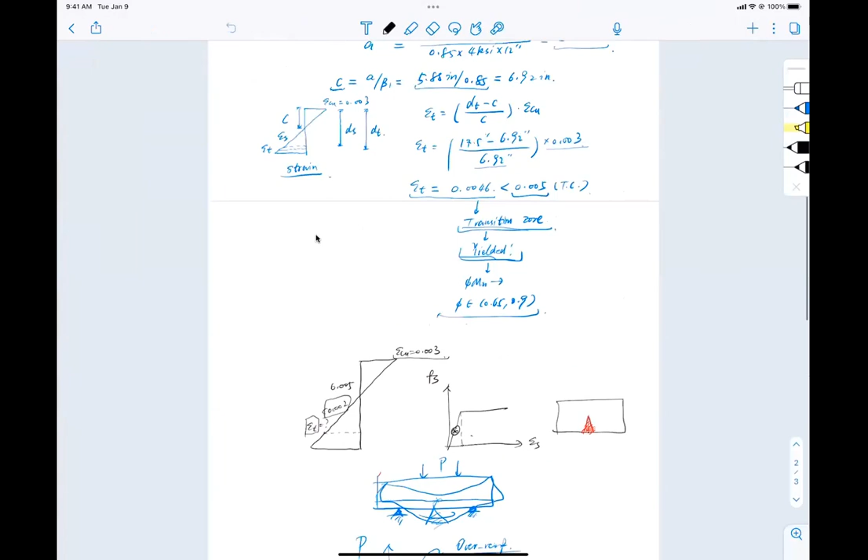Okay. All right. So let's talk about it. We had an example last time, right? What did we do last time? We have a section. Well, you know what? Sorry, but I can use last time's notes and finish this part and start with a new one. Okay. So last time we had a section like this. 4 number 9 bars at the bottom. We calculated the center of the 4 number 9 bars and found out the depth of it is 16.5 inch.

Okay. Now, quick thing here. I have 4 number 9 bars. They are spaced 2 inches apart. And let's just say I'm trying to find the distance between the center of these two rows, right? It's got to be 1 inch here, and this is 3.5 inch. And 20 minus 3.5 inch is 16.5 inch. That is faster than finding the centroid of the group of bars, isn't it? That is faster, right?

Can you always do that? Answer is no. Why? Because I got lucky. I got 4 of the same bar size. If the bars are different sizes, you cannot do that. So the safest bet is always go with the equation. Okay, don't just pick the center of the group of bars geometrically. All right, got it.

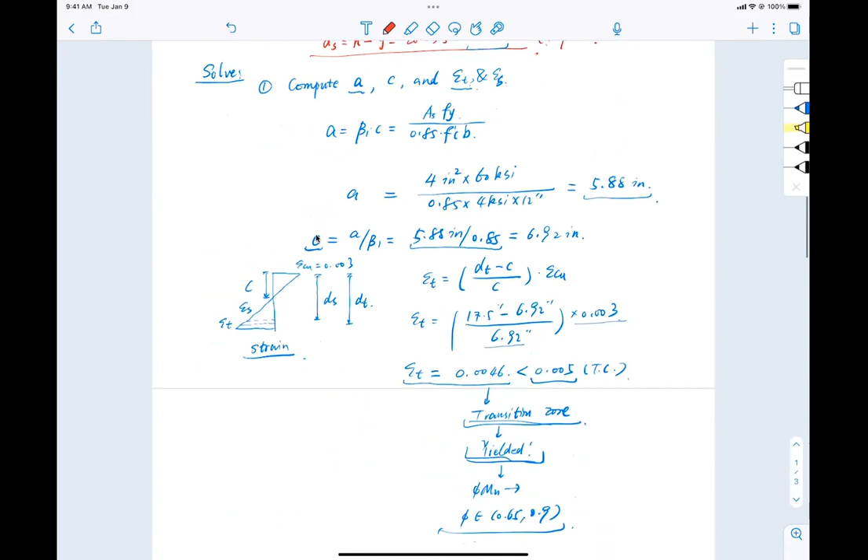Okay, quick thing. So now we got a depth equal to 16.5 inch, and we did the whole thing, right? Find out the compression side c, check the strain, and we left at a happy smiley face. That is, the strain in the steel is, well, not so happy, slightly lower than the tension control limit. What does that mean when you see this?

Well, first, it's bad, right? It's not 0.005. So I know that phi is not 0.9. It's probably smaller than 0.9, isn't it? Somewhere between 0.65 and 0.9. But is this one bigger than 0.00207 or not? Yes, right? What does it mean? It means what? Steel yielded. What's so good about yielding?

When yielded, I can always say that the stress in the steel is equal to what? Grade 60, equal to what? 60 KSI. There you go. So that's where I'm getting at. Trying to make sure I know the stress in the steel. And when the steel yielded, I know that it is 60 KSI. Why do I need to know that? Because As fy gave me the total tension force I start with. This is where I start with 4 inches of 60 KSI.

Remember? You say, Bob, you know that. Why are you doing this again? I'm confirming that. Don't forget, this was an assumption at that stage, right? At first, nothing happened, right? It's not like the Bible when God says something. We just make things up. We don't know.

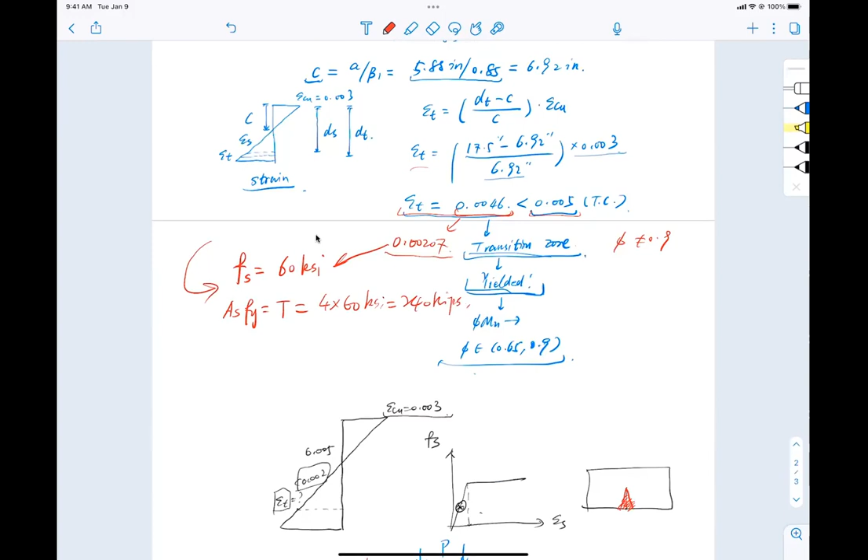And now we confirm that this is 4 times 60 KSI. That is 240 kips. All right. So that is why we're doing this. We're confirming it. Now we know tension is this one, and this business is about under reinforced, over reinforced.

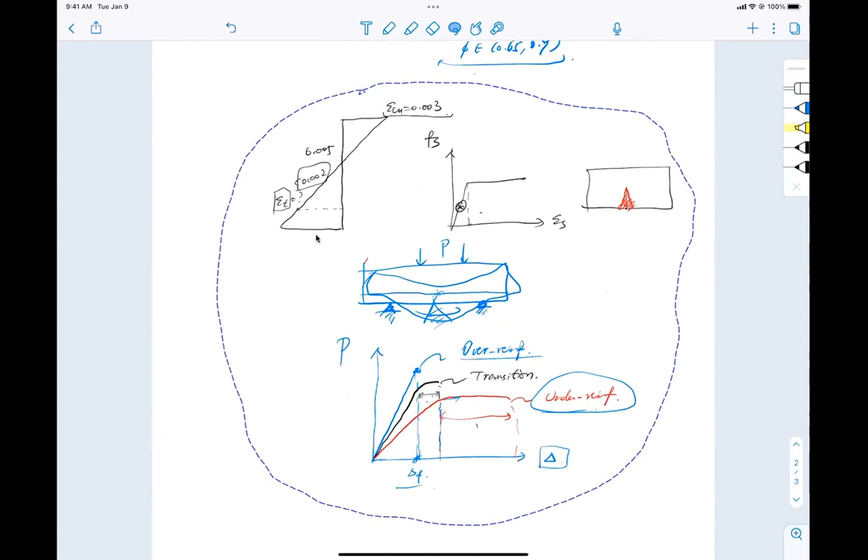But now let's continue this. I know the tension force is 240 kips. I want to find out my nominal moment capacity, which is Mn equal to T times lever arm. What is the lever arm here? We just said tension force multiplied by distance. What is distance here? Give you a hint. ds minus what? a over 2. Great. You got it, right?

So now Mn equals 240 kips, and get your calculator ready, right? I didn't do this myself over the week. I'm lazy. Remember, Bob is a lazy guy. I need your help to calculate the number for me. 240 kips times ds minus a, what is a? 5.88 inch divided by 2. So can somebody give me a number of this? Pull out your calculator. Let's do it. Come on, a lot of fun, right?

ds is 16.5 inch. That is the depth of it. 240 kips multiplied by 16.5 minus 5.88 divided by 2. Come on, I need a number. Anyone? Should I start giving points? 3,000. Louder, please. 3,254 kip-inch, right? Great. So are we happy with this?

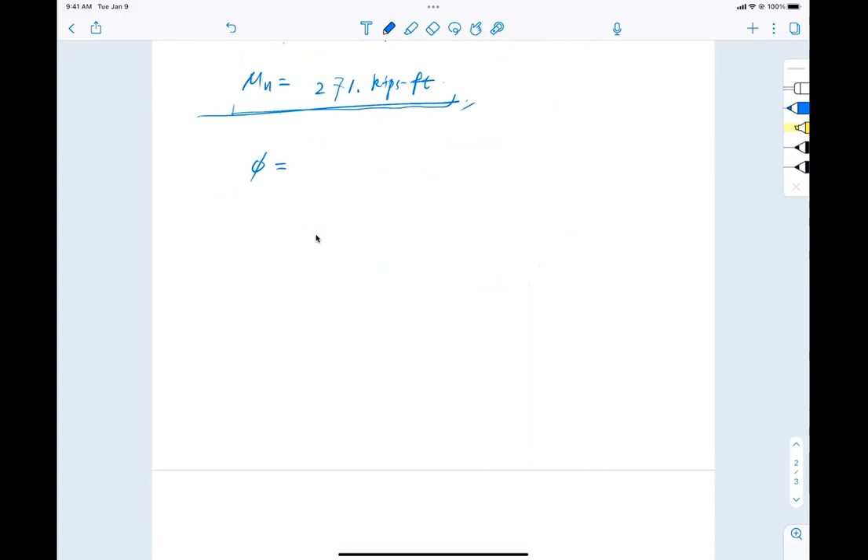Now phi, strength reduction factor. You remember the equation for strength reduction factor? Do you? Because I sure don't. I forgot about it. I'm lazy. So what do I do? I draw my drawings. So what does phi look like? This is phi. Horizontal axis.

What do I use? Epsilon S or epsilon T? T. There you go. Epsilon T, not epsilon S. You say why? Last time it happened in one row. This one is not one row anymore. So in this case, when I have epsilon T smaller than 0.002, what is my phi?

0.65. If it's bigger than 0.005, what is my phi? 0.9. There you go. So I draw a line like this and draw a line like that, and then in between, linear interpolation. And actually, this slope here is 250 divided by 3.

Okay. Now you have this information. Do you now remember the equation? Duh, I remember it. Why? Because now phi equals 0.65. It's the beginning of the step, right? I start climbing the ladder, which is epsilon T minus 0.002 multiplied by the slope, which is 250 divided by 3. And that, ladies and gentlemen, is my equation for phi. See how I remember it?

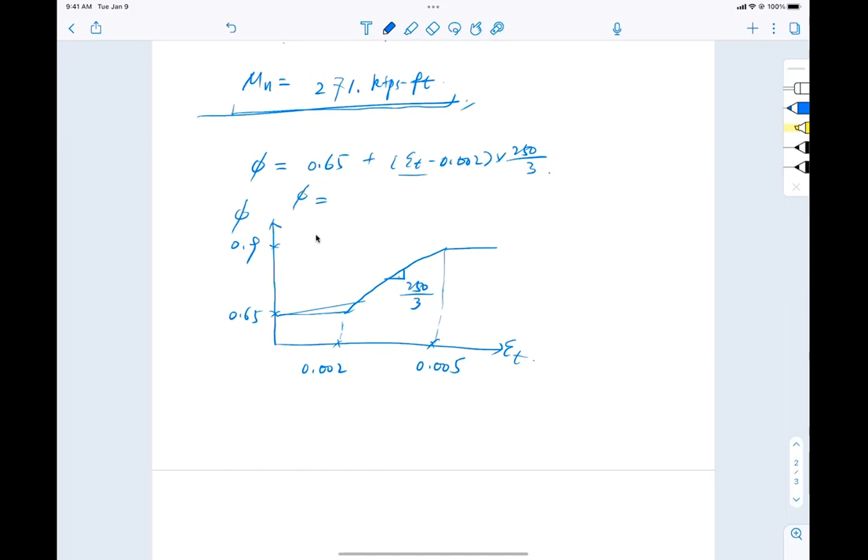You can do the same to simplify, okay? A dry equation will never stick in your head. You gotta have some graphic, some image to go with it, okay? Make life easier. All right, so now what is my strain in epsilon T? Let's copy it down. Phi equals 0.65 plus, what is epsilon T here? 0.0046 minus 0.002, multiplied by 250 divided by 3.

What do I get? Folks, come on, your turn now. Don't disappoint me, please. Let me hear some number. Use your calculator. 0.65 plus this fellow minus 0.002, multiplied by 250 over 3. What do you get? 0.87 exactly. Do I get a second? All right, good deal.

So now what is my design moment? Phi Mn equals 0.87 multiplied by 271 kip-foot. And what do you have, guys? What do you have? Don't stare at it. If you forgot your calculator, bring it next time, okay? You will need it for this course. What do you get? Any number? 235. Do I get a second? Yeah. All righty. We're moving on. Wonderful.

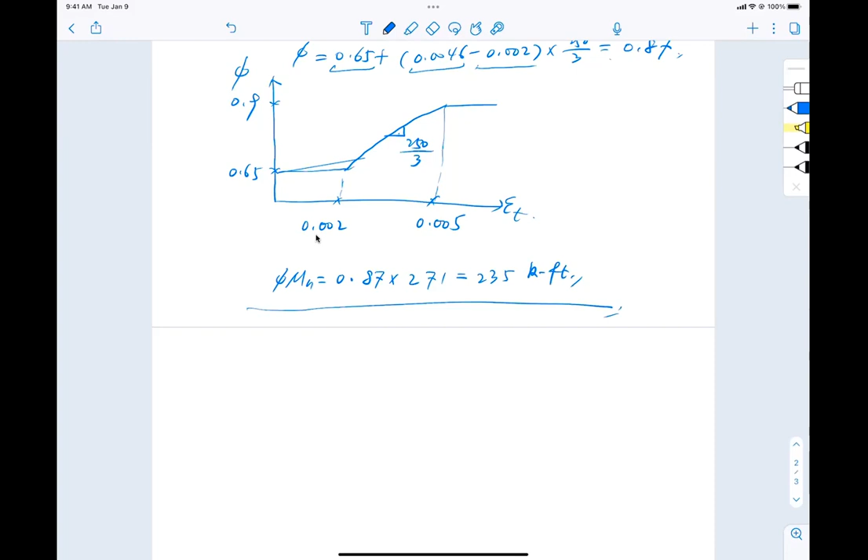That's it. Is it hard? If this happened in the exam, can you not ace it? Of course we will, right? It's simple. What if we make it more interesting? Just like in the casino, right? You pass the first slot machine, now we're doing Russian roulette. Let's play a little more. Red and black, what's the number? Same section, nothing has changed, but I'm going to change my reinforcement.

How am I going to change my reinforcement? Give me 1 second. Let me see if I have the old lecture note 3. Okay, I don't. I'm really going on the fly today because I didn't put the notes on it. So you guys really have to help me out here. I don't know the number. I have no idea. Bear with me 1 second. Let me at least have some backup plan in case I mess up again. 291.4. I think I got this one. Okay.

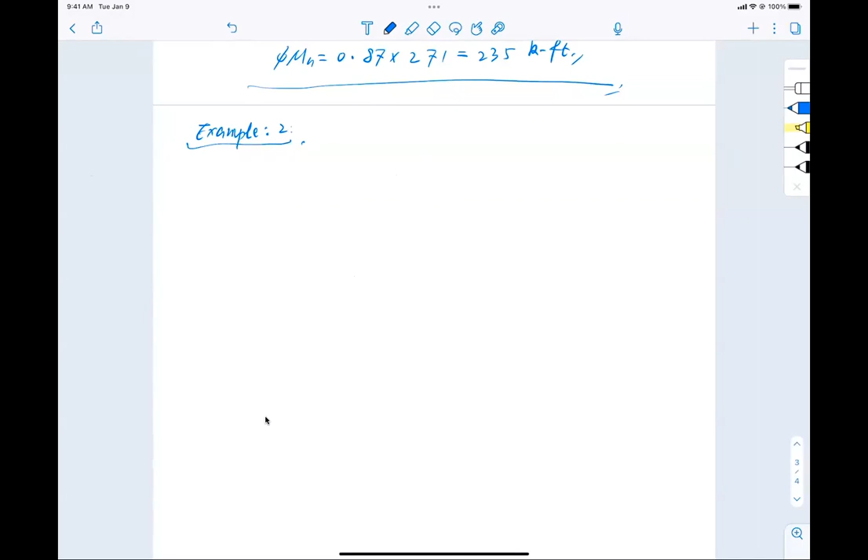Okay, so this is my old notes. Let me share my screen here. Where is my share screen button? Let me do share screen again. Okay. No, you guys don't see it? This thing, I'm telling you, slow. Anyway, let me just move this thing somewhere here. Sorry, I gotta move things around a little bit. Okay, not too bad. All right, let's open now.

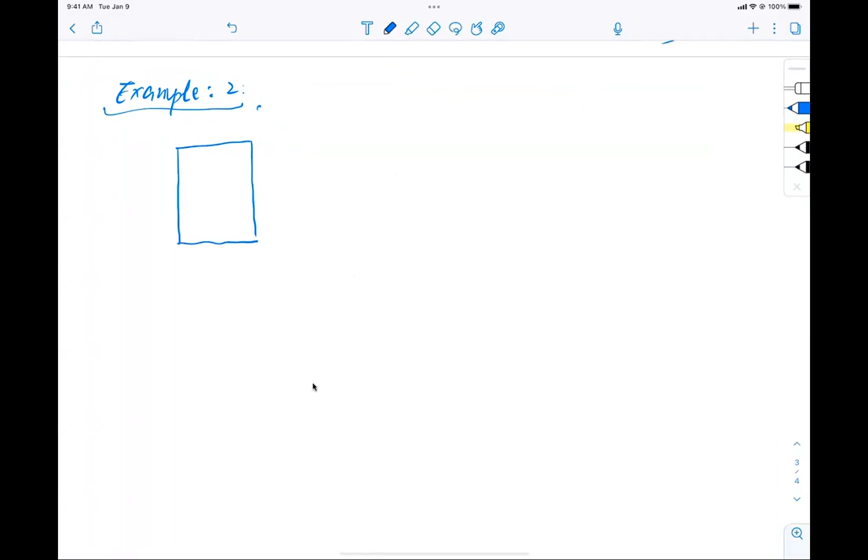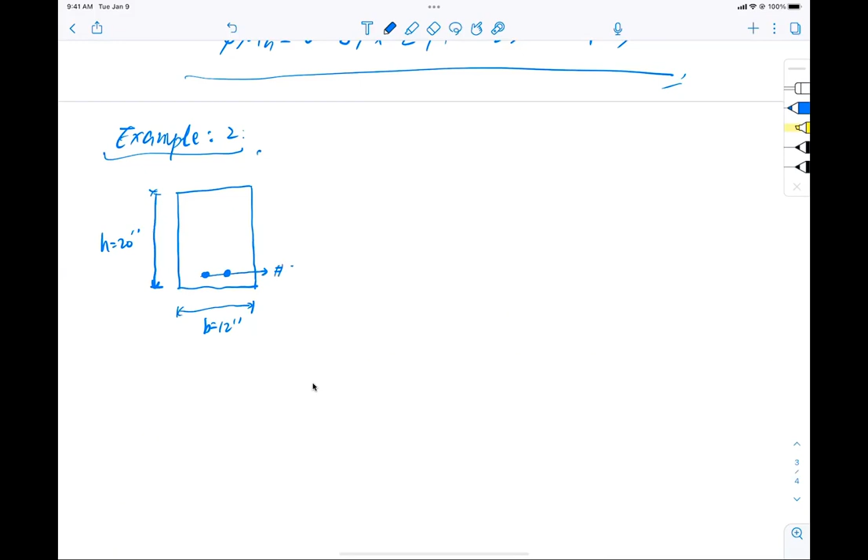Say now I have my section, okay? Same thing, the section remains the same. 12 inch of b, height is 20 inch. Everything stays the same in the sense that it's still number 9 rebars at the bottom, and this distance here is 2.5 inch. But instead of 2 number 9 rebars in the bottom, I have 4 number 9 rebars. Let's make it a little more beefy. And the top row is the same, I'm going to put 2 number 9 bars.

I have a choice now, folks. If it were up to you, will you do configuration number 1 or configuration number 2? Which way will you do? I got 3 for number 2, 1 for number 1. Which way? It's like an auction, right? Number 2 or number 1? Number 2, 5, 6, 7. Number 1, 8 over 4. Anybody else want to bid? Which way? You want to put it on the side or in the middle?

Imagine you're in the field, right? Frozen out there, freezing, it's cold. And you want to put the bar there and fix it. How are you going to fix it? You use what? Stirrups, right? What a stirrup looks like.

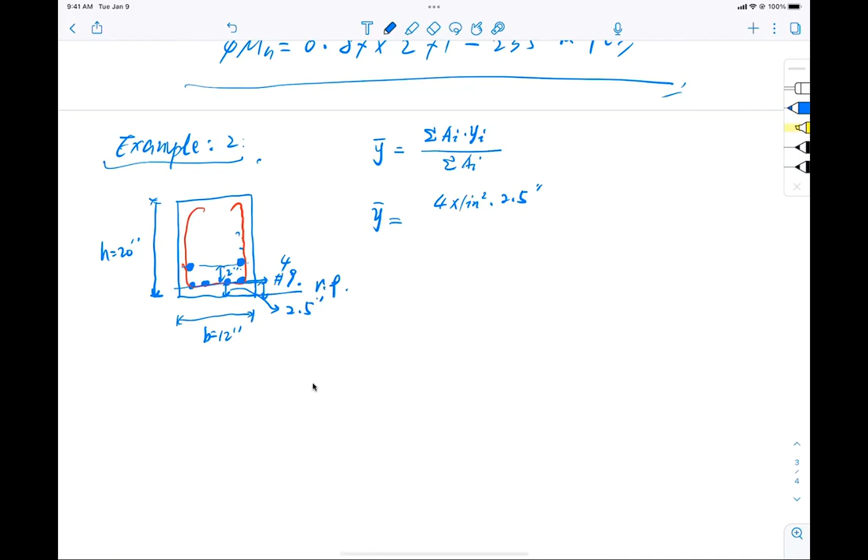So that is in the first row. At the bottom of the first row, how many bars? 4 multiply 1 inch square, so 4 number 9 bars, and multiply distance 2.5 inch. Where is that 2.5 inch coming from? I'm counting from the bar to the bottom reference line here. So that is distance, plus 2 multiply 1 inch squared, multiply 2.5 plus 2, so 4.5 inch. Divided by total area, 6 inch square. I have total 6 number 9 bars.

Can I get a number on this, folks? Pretty easy, right? Do I have to do calculation in my head? Come on, some number had to come out of it. This is 10, this is 9, and this is 6. Come on, before I finish, you better finish it. What do you have? Somebody? You're slower than me? Calculator doesn't work? Check my number at least. Confirm, is it right? Okay, good deal, thanks. So that is the distance.

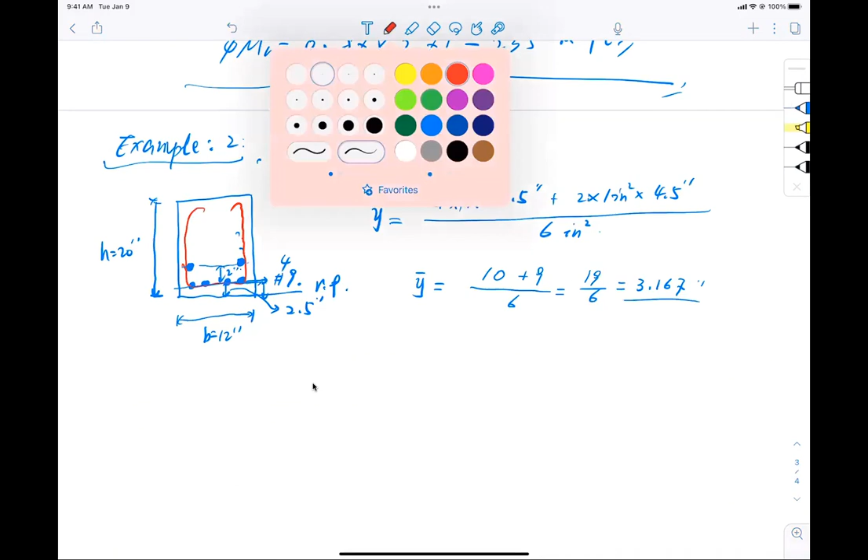So where are we at? We're at 3.167. So let's just say 3.17 inch, round it to 2 digits. Rule of thumb for reinforced concrete: if you go with strain, 0.00207, that is three effective numbers. Stress, kips, and everything, 2 digits after that. Just our rule here, to make things easier. I don't want to see crazy rounding issues. Okay, so that is the center of it.

Now, what is the depth? ds equal to what? H minus y bar. So H is 20 inch minus 3.17. I cannot do that, that's too much. What is ds? Help me out. Come on. 16.83. You got it. I confirm that. That is the depth of it. Now you have depth.

What's the first step now? Step number 1. This is all so far prep, I'm preparing myself. Where do we start? Tension, right? T equal to As times what? Grade 60, fy. 6 inch squared multiplied by 60 ksi, 360 kips. Good. And with tension, I'm talking about compression. So tension equals compression, a equal to As fy divided by 0.85 f'c b. And this is 360 kips.

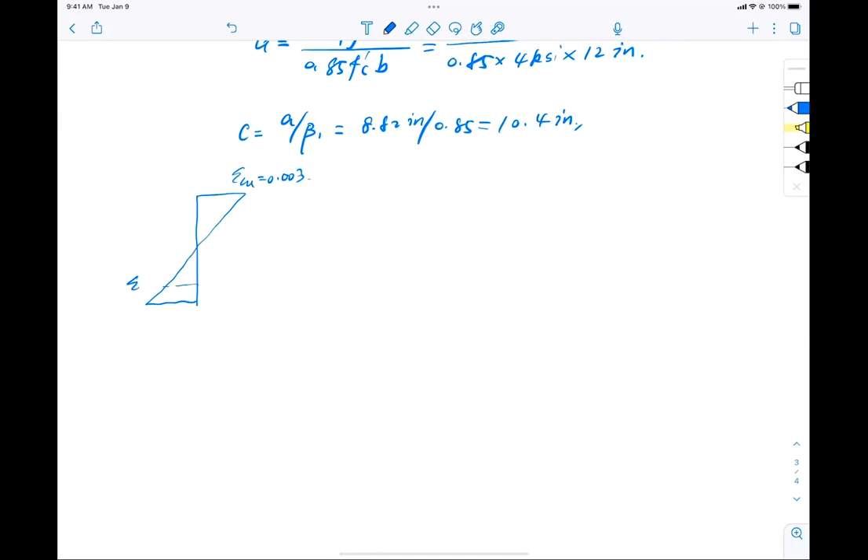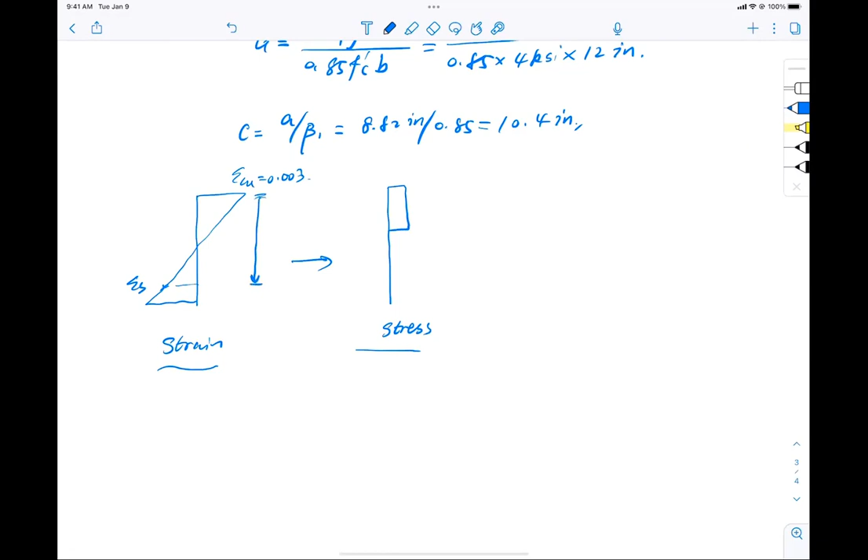So the strain diagram looks like this. Epsilon Cu equal to 0.003. And I have some strain at the bottom here, epsilon S. And I want to do my stress, but before I move on to stress, right? This is strain, this is stress. And suppose I will do internal forces and everything, right? Before I move on to that, let me see this. I have a depth ds, what is my ds? 16.83 inch. Okay, and I have my concrete compressive zone C equal to 10.4 inch. Okay, and I can calculate the strain in my rebar now. And this is not the bottom, this is just the group of the bars, the center of the bars.

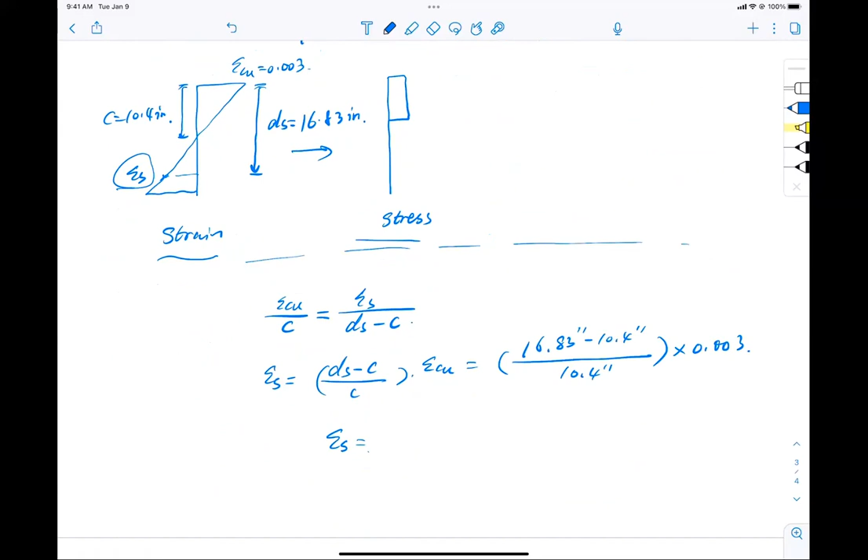Anything? Anything? You know the number already? Be careful. I'm going to call on you next time, okay? Now, what is it? What is the strain in the rebar? What is it? Come on, do it. I really don't know my stuff, okay? We're risking it together, okay? Every day the problem changes. I don't know, right? It's like in a casino again, okay? What is it?

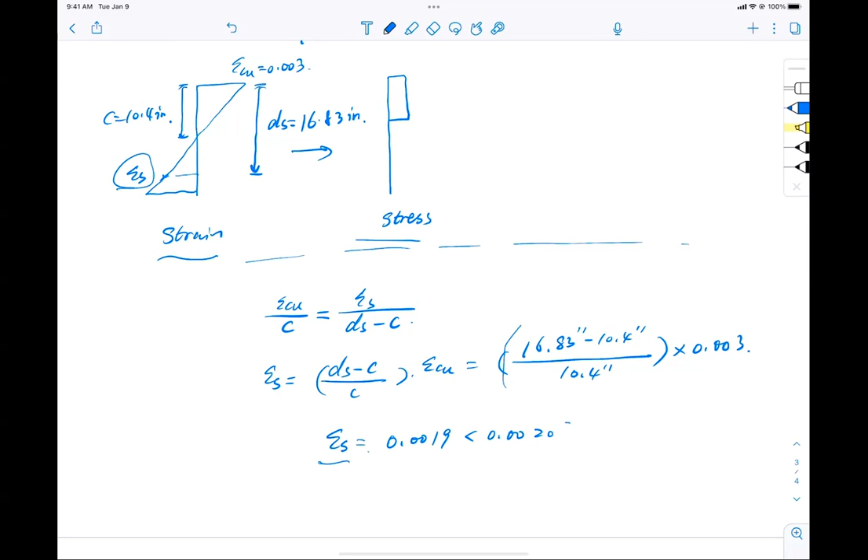0.0019. Okay. Do I get a second? Okay, good. Are we happy? No, we are very, very scared. Why? Smaller than 0.00 what? 207. Okay. What do we do? Well, I don't know. I'm a tough nut, right? Let's just continue, right? I mean, it's bad. Let's see how bad. Because I'm given the section. It's not like I'm going back to design it anyway, right? I want to proceed. Shall we? Sure, you can. Nobody said you cannot, right?

So how to proceed at this level? What is the consequence of this? All promises have been broken. What is the first promise, the first assumption we made? Steel yielded. It does not yield, right? So what we do is iterations.

Now, with this, I say, okay, I need to calculate the stress in the steel now. So Fs, which is stress in the steel, equals the modulus of elasticity for steel, Es, multiplied by epsilon S. What is Es? 29,000 KSI, folks, remember that. And multiply by 0.0019. And what do you have? Come on, do it. Give me a number. Louder, please.

55.1. Do I get a second? All right, good deal. So that is much lower than the yield strength. And to make a correction, this is not kips, this is KSI, okay? Stress. All right, so now that is taken care of. So the total tension force becomes what? As, steel area, multiplied by fs, but instead of yielding, I have 55.1 KSI multiplied by 6 inch squared.

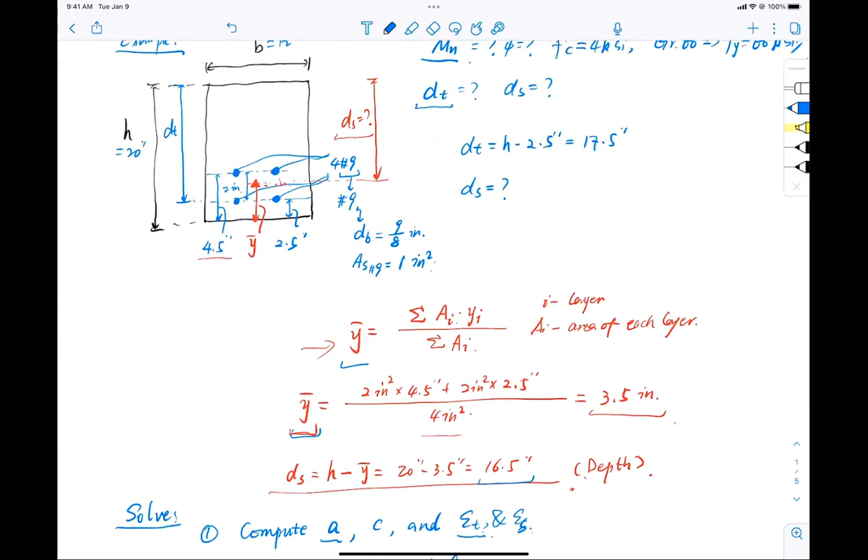Long time ago. Remember, before everything happened, before Luke's your father, you know. So that means we go back to square one, and that's where we started with. What does this mean? It means that we're on the borderline. So which way do we proceed? After 2 or 3 iterations, we will proceed with this number here.

So that means the strain will stay under the yield strain, because using this number, what strain do you get? Remember, we did that already. Epsilon s equal to what? 0.0019. Okay, so at this point, we will use this strain to judge the strength reduction factor phi, but we will still use Mn equal to T times distance d minus half a, where T is this 360 kips. Strange, right? But that's how we do it.

Why? Because we keep the yield strength of the bars to increase the nominal moment resistance. But considering we are risking here, we're using a lower strength reduction factor to be safe. So this is the compromise. All right, so let's finish it. So I'm gonna go find the Mn. That is As fy, 360 kips, multiplied by distance ds. What is ds, folks?

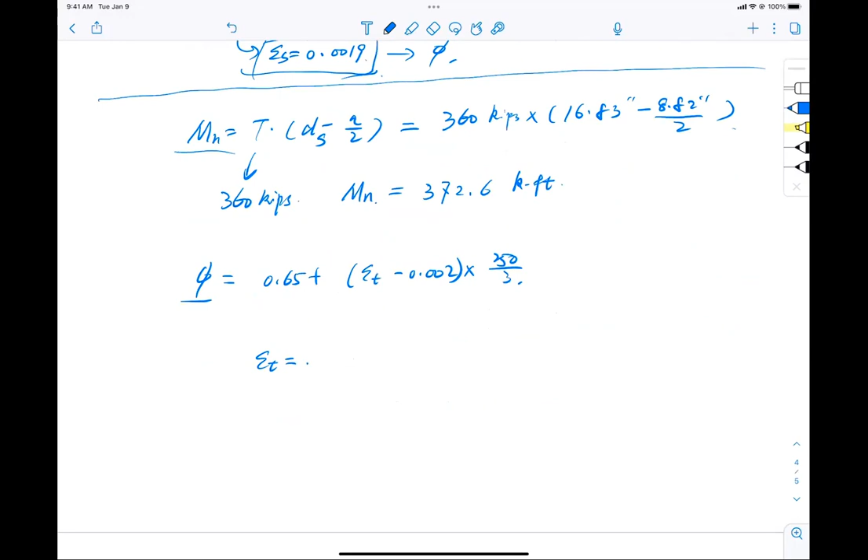0.65 plus epsilon t minus 0.002 multiply 250 over 3. What is epsilon t here? I don't know. I really don't know. Why? Because I used epsilon s. Remember 0.0019, that was just judging whether it yielded or not. Okay, has nothing to do with epsilon t. So how do I find epsilon t?

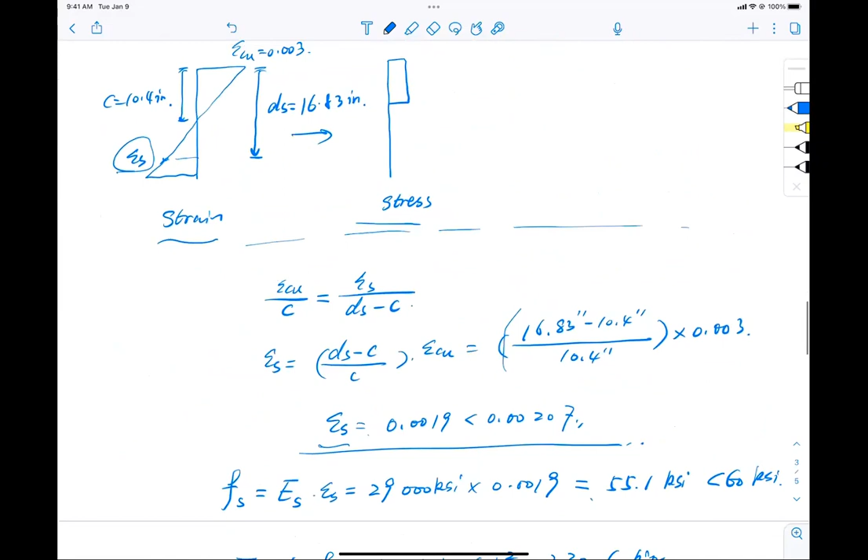I use the diagram. This is epsilon cu 0.003, and this is c, which is now 10.4. Is it 10.4? 8.82 divided by 0.85. Yeah, 10.4. And this is ds. But I'm trying to use dt. So what is dt? dt is equal to h minus the concrete cover, 17.5 exactly.

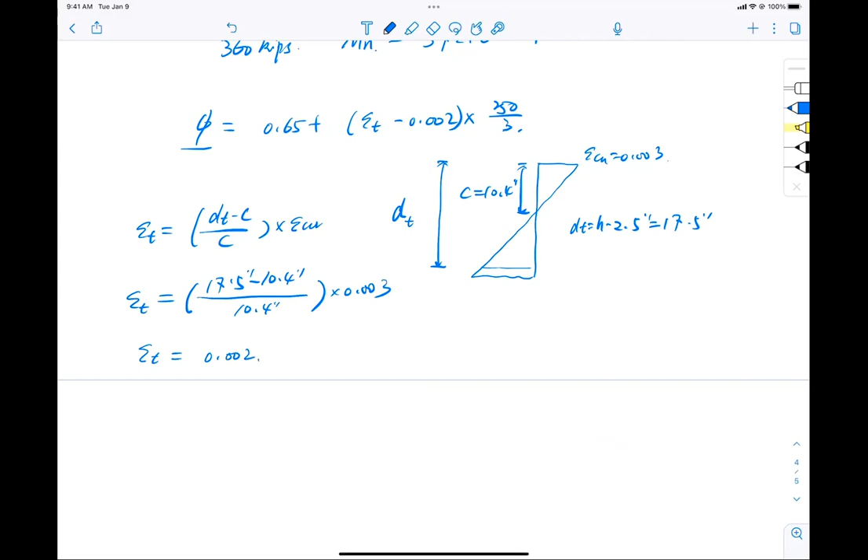Okay, so now let me just put this on the side to calculate. Epsilon t should equal to dt minus c divided by c multiply epsilon cu. So 17.5 minus 10.4, divided by 10.4, and then multiply by epsilon cu. Come on, what you have? Let's do it. 0.002. Do I get a second? Spot on. Okay, good deal.

Now with that, what is my phi? 0.65 plus what? Say again? We don't have to do that. Yes, you're right. So plus 0. 0.65, right? That's it. Because it's not yielding, right? So that is 0.65. You don't have to do anything. So now what is Mu? 0.65 multiply what?

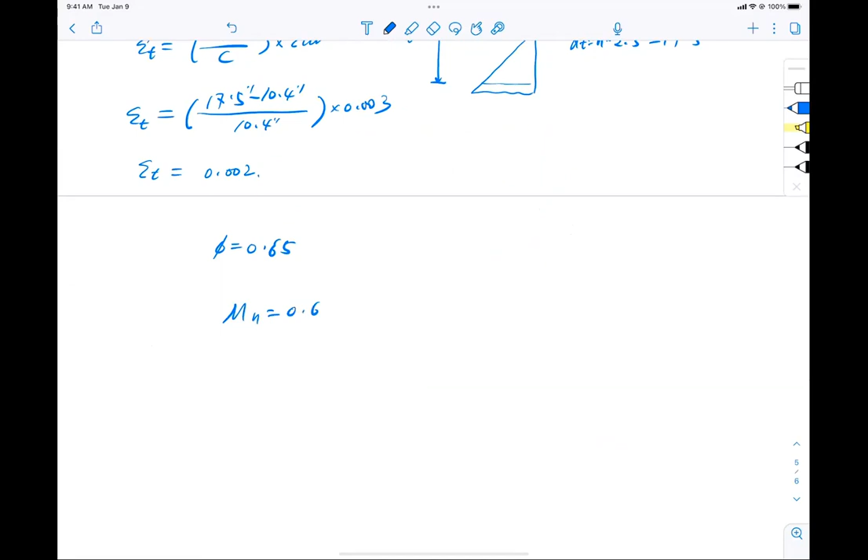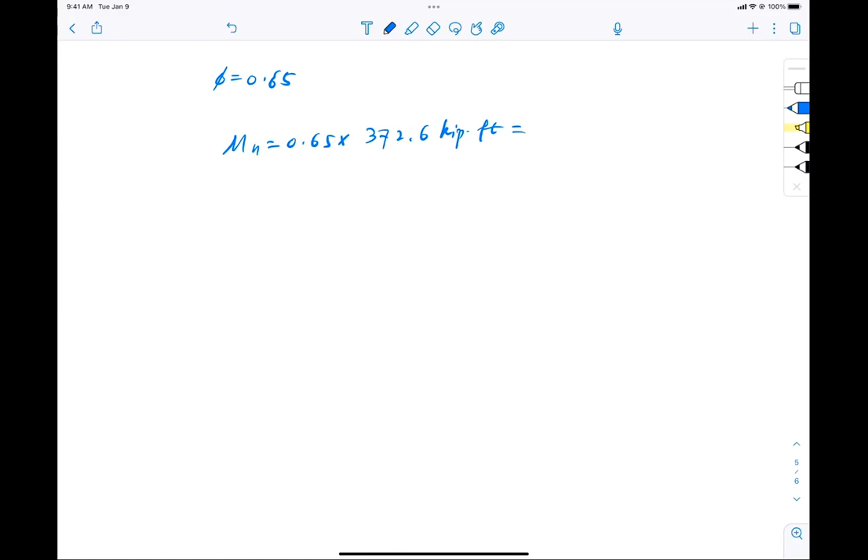372.6 kip-foot. What do you get, folks? What do you have? Come on. 242.2 kip-foot. Do I get a second? Anybody? Agree, disagree? Come on, I need a confirmation. Important to me. Good. So this is second case.

What do we learn? I don't know, Bob. You draw something, I saw it, and that's what we learned. Well, we finished the last example, but did one more example today, right? First example, 20 inch of section height, 12 inch of width. How many bars we put in? 4 number 9 bars. And what is that capacity? 235. In the second example, how many bars we put in?

6. And comparing to 4, what is the percentage increase? 50%, isn't it? That's quite a lot. What do you expect? I expect I get 50% more moment resistance, right? Because steel is expensive. What you get? 242. How much of an increase? Almost nothing.

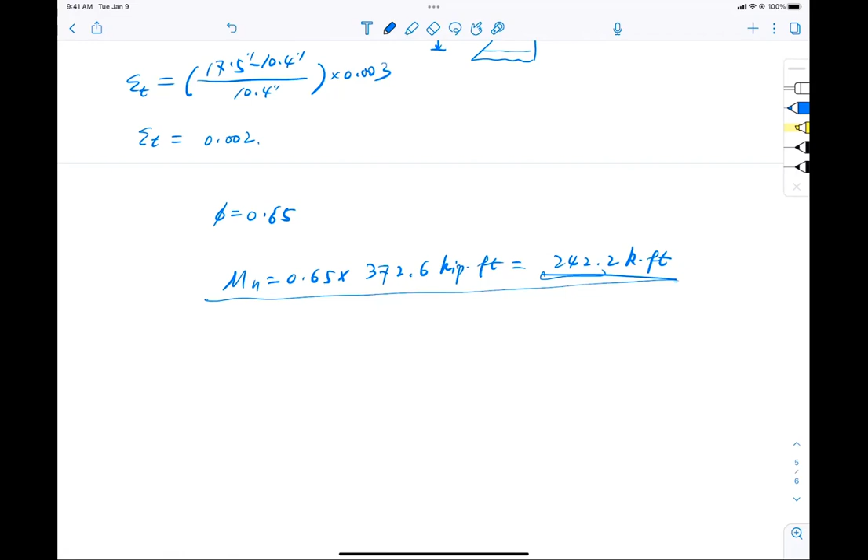So answer me this. Can you blindly add steel to your section to make it stronger? No. Remember this. On the job site, if somebody said, oh, not enough capacity, put steel in it, you say, go back, take Bob's class. Got it? See you on Wednesday, and I'll show you a different way of changing it, and much better.

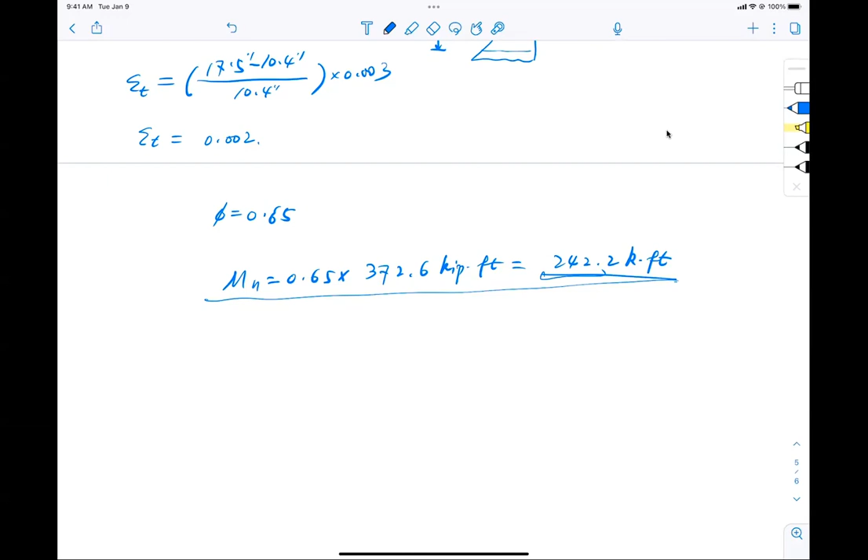You're in the track team or anything? Football. Okay, good. May teach me something next time. All right, see you later, man.